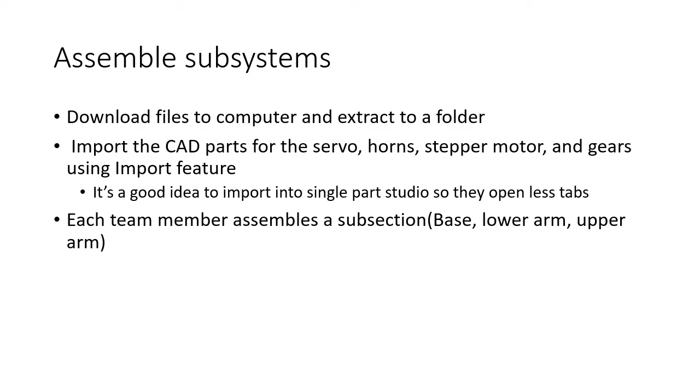After you and your teammates have created all the parts in Onshape based on the CAD drawings, you have the base, the leg, the waist, the upper arm, lower arm, and wrist. Make sure you've renamed all the parts as well, so it's easier when doing the assembly.

Before you can create the sub-assemblies, you'll need to download the compressed files of all the parts that came from somewhere on the internet that you don't have to redraw yourself. To do that, you'll go pull the robot arm import parts from Google Classroom and save it to a certain location.

To download it, you'll need to click the menu button and say open a new window, and then download. You can save these into the download folder or some other folder on your computer that you know how to find.

Once it's done being downloaded, I can say show in folder. And then I want to extract them. So I right click on it and say extract all. That's fine. Give yourself a location to extract it to.

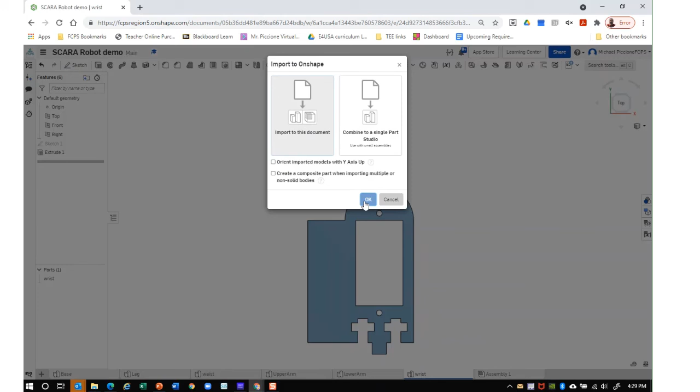And then we'll check back when it's done importing. It may take a few minutes. Once it's done, it should say translation complete, and you should now see the items show up in your list. We have the 40-tooth gear, the stepper motor, the micro servo motor, a gear rack if you want to use it later, a servo horn, the 20-tooth gear, and the 10-tooth gear.

After importing the parts into your main robot file that you share with your teammates, now each teammate can use these parts to create assemblies for the second part of the assignment.

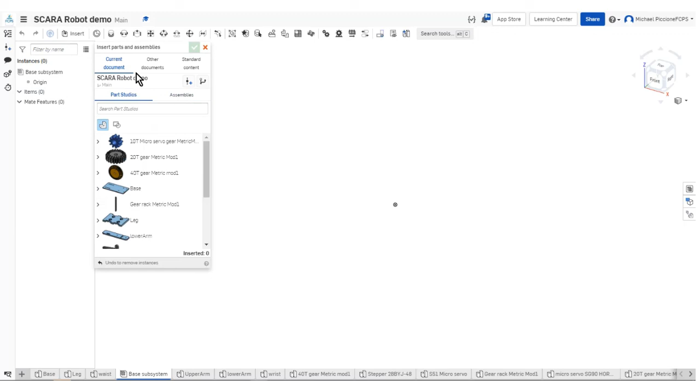Then I'm going to insert the parts I need, and I can find those by looking in the current document Part Studios. So I need the base, 2 legs, and the waist. I'll need other parts later, but I'll bring them in after I'm done with this part of the video.

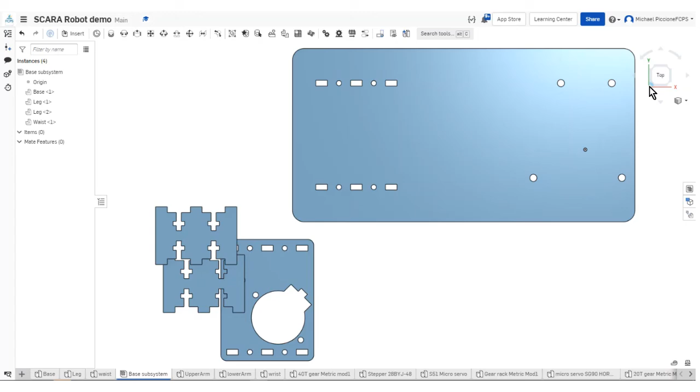So first thing we're going to assemble is the legs to the base. When assembling the base, you want to make sure that when looking at it from the top, the holes on the bottom are farther apart than the holes on the top horizontally. Otherwise, you're looking at the other side of it. If you're looking at it this way, you'll see it differently versus this way.

So the first thing we're going to do is a fasten mate. We click fasten, and we're going to click the bottom of one of the legs, so I get the handle that shows up in the center of the rectangle. I might need to roll over the edge of the surface so I can see the blue alignment tool perpendicular to the face of the rectangle, and I'm going to click the same alignment area on the bottom of the base.

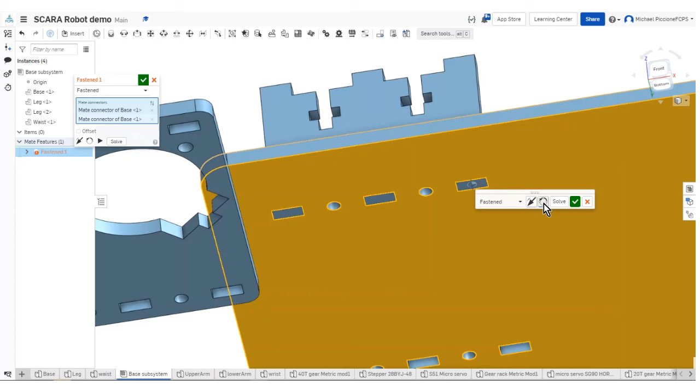If you roll over this, hover on the surface, and then you can click on the center of that rectangle. Once clicked, you can see it inserts it and aligns the blue edges up. You shouldn't need to rotate or flip. If it's good, you click OK.

I'm going to do the same thing again for the other one. You always have to click the part that moves first versus the part that stays still. It seems to highlight it red, I might need to do it again. Sometimes it has an error, it says. Let me double check. Sometimes I find it gives weird errors, and if that's the case, you can always delete and do it again.

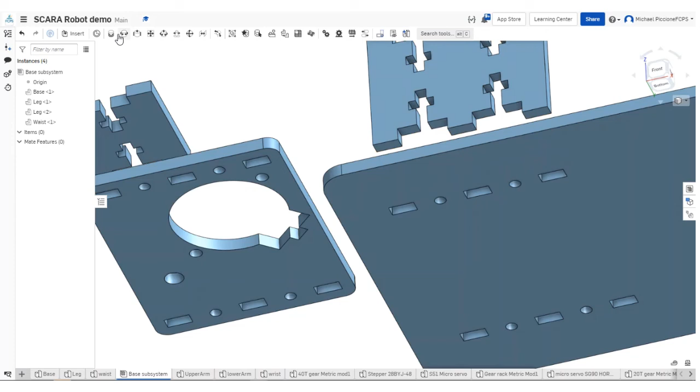This time we can show how you can do it from the center rectangle. It really doesn't matter which rectangle you use. And there, that snapped right together. So we click OK, and do the same thing to the other one, fasten.

I called this the foot, I think, in the instructions of the leg. Just make sure you line the correct rectangle up on the base.

If you click flip directions, it's going to put the piece on upside down, and you don't want that. If you need to, you can change the offset to adjust it up or down, or left or right, but it should align correctly if you click the right spots.

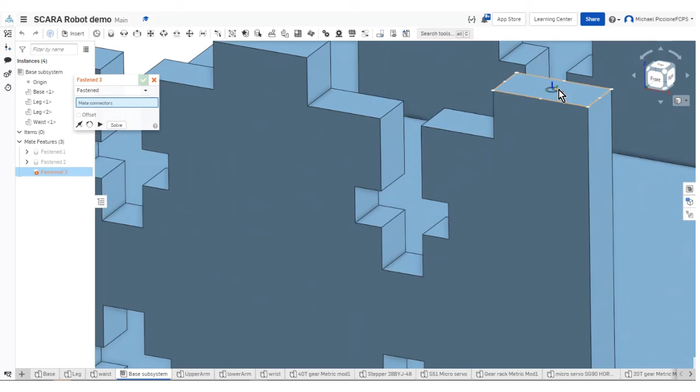Now I'm going to basically do the same thing with the waist onto the top of the legs. So fasten. I'm going to click the top, hover on the top surface of the rectangle of the leg first, then click the center point. I'm going to orient it so the motor notch is facing the inside of the base. So I'm going to zoom in and make sure I hover over the flat surface on the top so I can get the handle to grab.

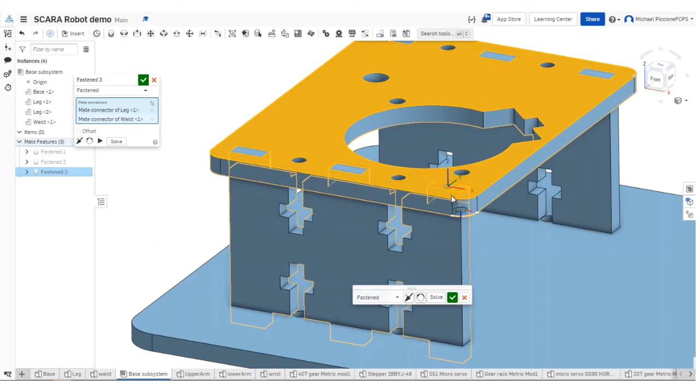Sometimes it's difficult to do, and you might need to change the angle of your view so you're able to select other surfaces. Click here. It snapped it over there. Because it can only handle 2 parts at a time, remember to say solve to show it in place, and we say OK. Now it should be locked in place and I can't move anything. Now I'm going to go ahead and fix the base so it can't move.

Now I want to insert the stepper motor. Insert, choose it from the list. Click OK to the insert tool. Now I can't assemble it just yet because if I click and drag on the pieces, I can see I can actually take it apart, which is what we don't want to do. So don't do that. We're going to select everything with a window select of the stepper motor, then click the group command and OK. Now if I try to separate it, I can't separate it like I could before.

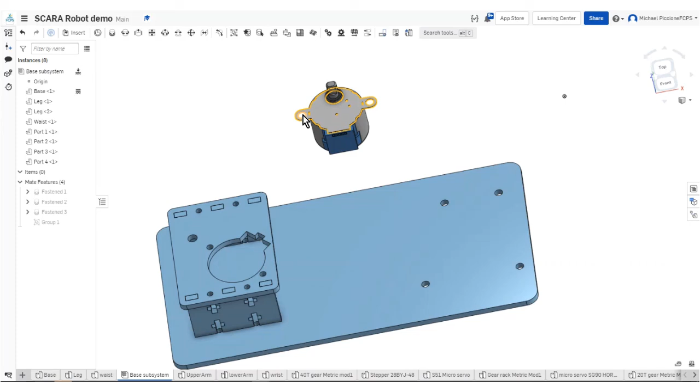Now we can work to assemble it in the right spot. I'm going to use the fasten tool and try to line up the circular hole for the mounting bracket in the motor to the hole in the waist, then adjust the angle until the faces are parallel and the holes line up.

Unfortunately, I don't think our dimensions match, since the waist is in inches and the stepper motor is in metric, the distance from center to center on the holes doesn't match perfectly down to the micron, so it won't let you do a 2-hole assembly on it.

So we're going to say fasten. I'm going to click the top of the mounting hole in the waist for the stepper motor, and then the underneath side of the corresponding hole on the stepper motor. Sometimes you need to change the angle to grab the handle you want. There it is.

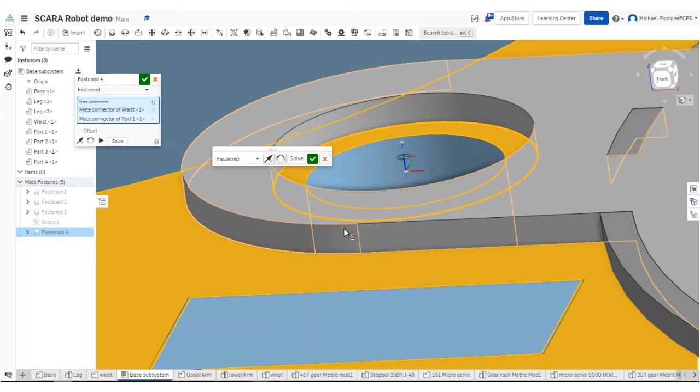And so I'm first going to zoom in and make sure the offset Z height is correct, so it's sitting on top of the waist. It looks like it is. And then I may need to reorient the second axis.

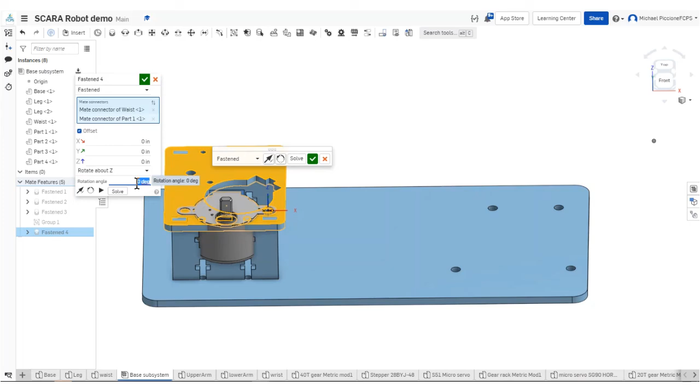I can get to that menu by clicking the offset command. Now we want to rotate about the Y axis, and it should be within 45-degree increments. So first we'll try 45 and hit tab. Oh, that looks like it's the wrong axis in this view. Let's Control Z, undo that. We want to rotate about the Z axis, I'm sorry, I had that wrong. We want to rotate about the blue axis, that's what was Z. So let's try 45. There, it looks like 45 degrees did it.

If 45 degrees didn't do it for you so the holes line up, you might need to go 90, or 90 plus 45, and kind of just guess at the increments. And so we say okay. There is a small error in the file in that this particular stepper motor I downloaded online does intersect our model a little bit here. And when you go to assemble it, we'll have to just kind of file off or use a little bit of sandpaper to sand that piece out.

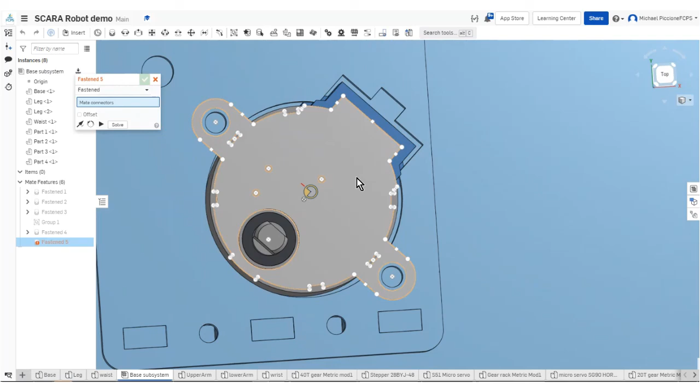All right, so now we're done with the main assembly unit. Next, go on to the base subassembly part 2.

Now that you have the base section assembled, you want to use the Insert Standard Content feature to bring in screws and nuts to make the assembly more realistic and to keep track of the number of parts you need. So you're going to choose ANSI inch, bolts and screws, machine screws, and for this purpose we want panhead machine screws, size 4-40, PH for Phillips, length 0.5, thread length 0.5, and so we say insert.

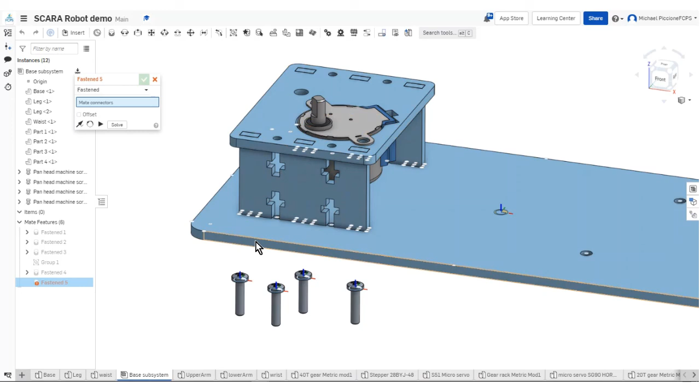So they're going to go in the holes for the base, so we can just use a fasten mate. You're going to click the underside of the screw head where the handle shows up, and they will go along the same alignment hole on the bottom here. And if they show up backwards, just flip primary axis and check. So we'll do that a few more times.

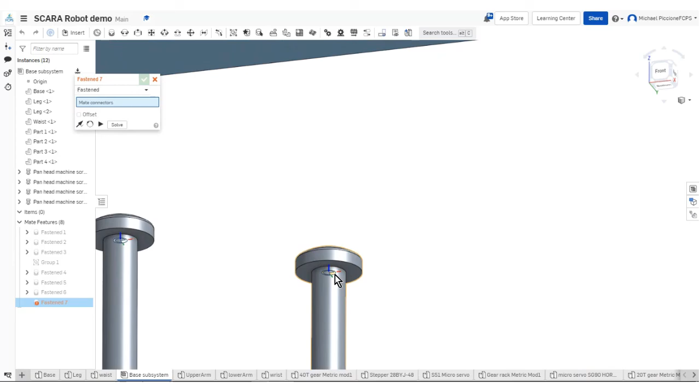Put these on this side. Must not have clicked it on the other one. There it goes.

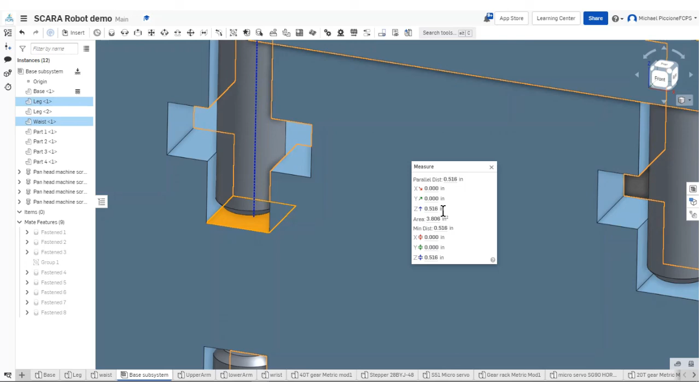They're in place. One way to determine the right length of the screw is to use the measure feature. We click it, click the top surface of where the screw head would attach to, and then the bottom surface of where the screw would run into. We can see that distance is Z, just over 0.5 - 0.516, or if we remember in our directions, 33/64, so it's just beyond half an inch. So we know that a 0.5 screw would fit.

Now we need to put a nut on the screw. Insert, standard content. This time we're going to choose the nut selection, machine screw nuts. We want hex machine nuts, and our size, of course, is 4-40. If you click the bottom chamfer, it'll look like the ones you actually used in your assembly. So we say insert.

I'm only going to insert one and then show you - actually I'll insert two and show you a faster way to duplicate it. So we're going to put the nut on this screw here. The way to figure out how far to offset it is we can use that show measure feature again.

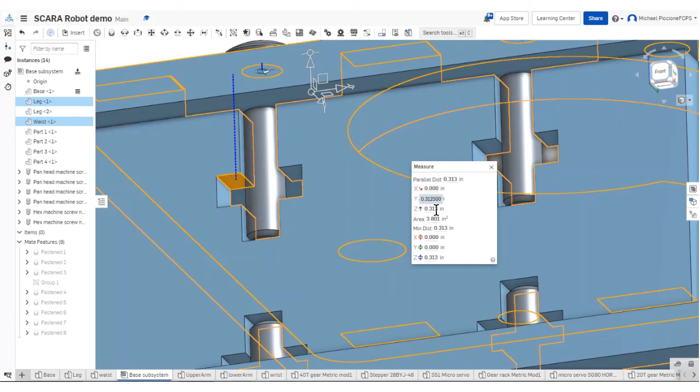So we want to know how far it is from the face of the top of the waist to the face the nut would rest against if you tightened it down, and it says a Z depth of 0.313, which is actually 0.3125, and that's 5/16.

Now I can use fasten. Pick the top of the screw head as always, making sure the handle's highlighted, and then I'll click the handle on one side of the nut on the top side, and we can see it put them together face to face, so I want to offset that Z distance 5/16 or 0.3125. I can click tab to see it in place, and it looks like it's the right depth, but we can see the nut is turned 45 degrees off.

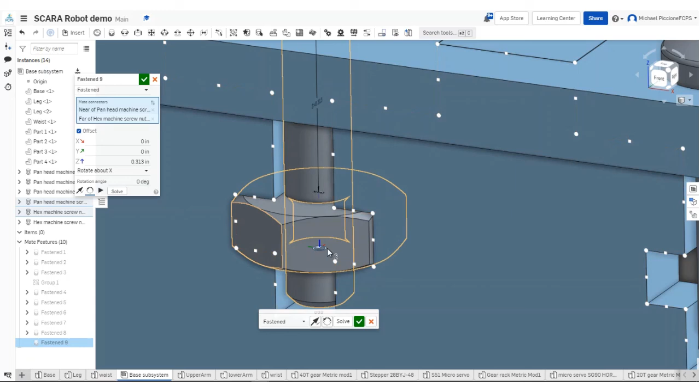So we're going to rotate it so that it sits with the flats against the flat here. We can click OK, and now it looks like it's in the right spot. These nuts are a little bit bigger than the ones we're using in class, so they actually don't quite fit, but that's okay.

Now you could do that over and over on the other instances, or we can also use replicate. What replicate allows us to do is select instances. So if we want to replicate the screw and the nut, you click match face to parts, or you can click face to features or individual faces and do it one at a time. If I say match face to parts...

And click the top surface of the waist, you can see it replicated the screws four times. And I can click OK.

It actually did it twice over here, so I now have two on my previous instance. I probably shouldn't have done that and shown you this trick first. So if you need to, you can just go delete it. I'm not too concerned - that was the first one we did, so I can go and delete that.

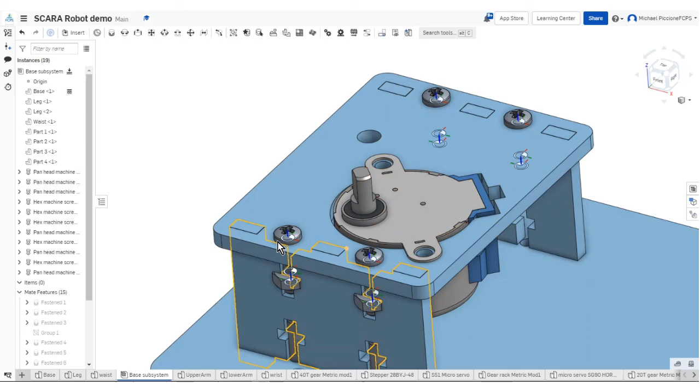Then I can do the same operation on the bottom after I install the nut on this particular screw. It doesn't work to do replicate well when you're changing orientations of a part, because they show up upside down and they're kind of difficult to get turned around.

So we'll just click fasten again, fasten the screw to the nut, make sure to click the correct side of each piece so that when you do the offset, it's the correct distance - 5/16 offset.

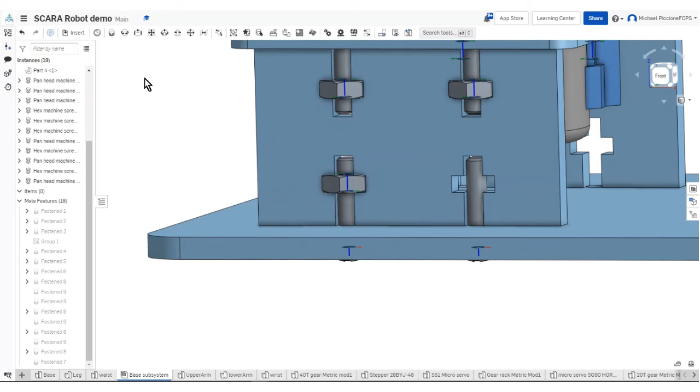That looks right. I need to reorient the second axis to spin the nut around so the flats are against the flats. Click OK - that's good. Since I'm going to use replicate again, I'm going to go ahead and delete this one out of here.

Replicate: select the screw, select the nut, match edge to face, find face match, so click the blue box. I'll highlight the face and it'll go ahead and replicate these. Sometimes it'll go ahead and do these holes too, but it shouldn't, because they're a slightly different size.

All right, that looks appropriate. And we click OK. And there we go, it's all done.

Now, if you don't want to see those handles, you can just say hide mates. They show up on the pre-inserted parts. So we can select them all and hide mates. It looks like they're still on the nuts, though.

Oh well. It's got so many mates in there because of the replication. It's hard to turn them all off.

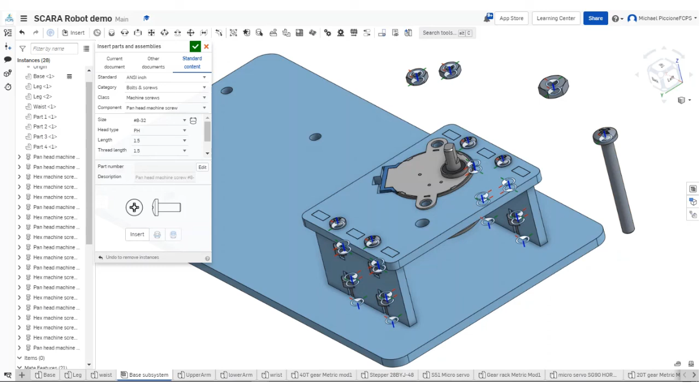Now we're going to insert the screw here and put the nut on top. Fasten, screw will go underneath in this hole here. Flip primary axis, and we'll say check, and then we put the nut on top.

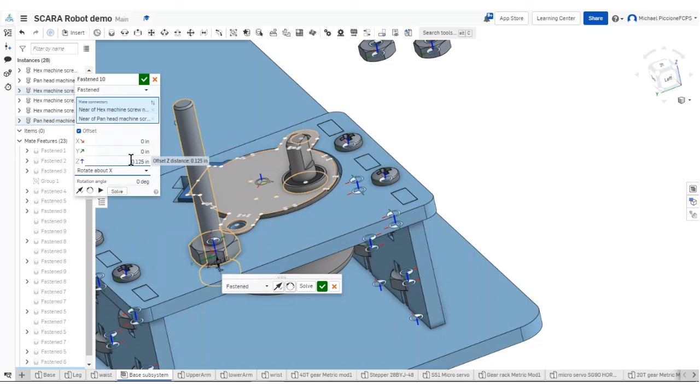And the offset on this one will be 1/8 of an inch. Sometimes you need to do negative 1/8 of an inch to get the offset the right distance. All right, there we go. I'm not going to show you how to do the assembly on these 2 screws because you can do those on your own. Having done all the other ones, you don't need help now.

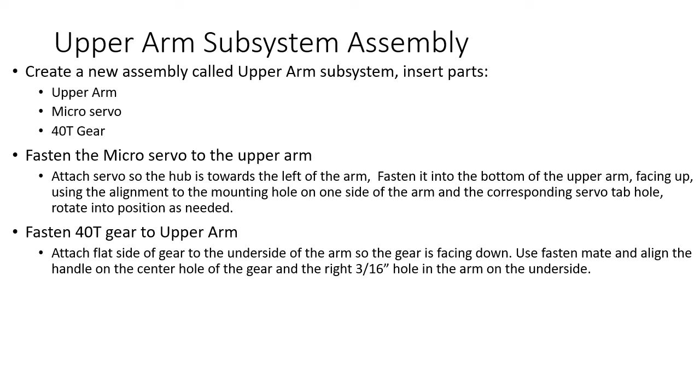To create the upper arm assembly, we'll first create a new assembly and label it upper arm subsystem.

Then we'll insert the upper arm into the subsystem, the 40-tooth gear, and the micro servo.

First, we'll fasten the servo into the slot in the upper arm so that the hub of the servo is on the left side of the upper arm, farthest away from the center mounting hole for the gear. The servo will be mounted in the upward position on the underside of the arm.

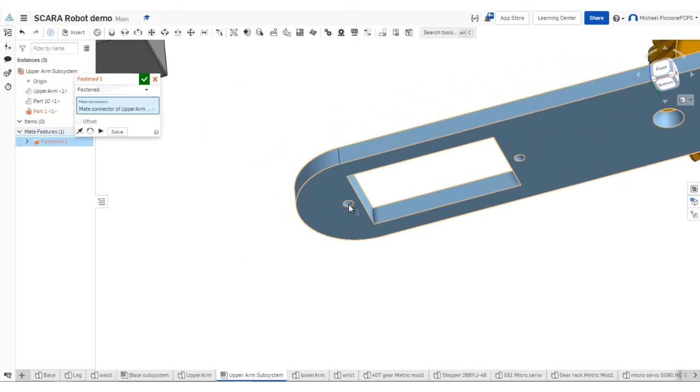So to do that, we're going to click Fasten. I'm going to grab the alignment handle for the hole that's on the farthest left side of the arm. Then the top side of the alignment handle on the servo as well, on the side that has the hub.

If you're not careful, when you go to click the alignment handle, you'll grab the wrong one. So zoom in and make sure: if you roll over the center of the face, it's not the same as the center of the circle. You want to roll over the edge of the circle to grab that alignment handle.

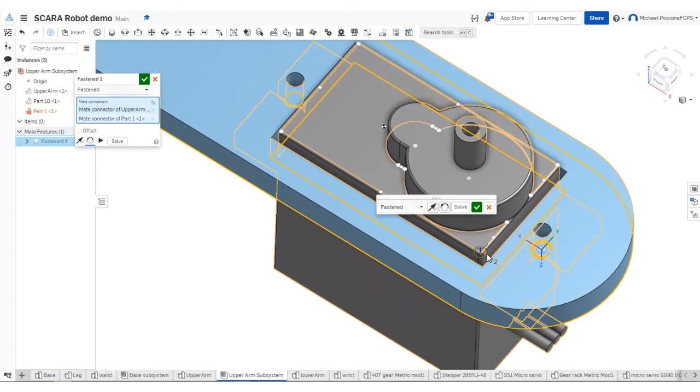Once I clicked, it pops into place, and then I can reorient secondary axis to spin it around. Once spun around completely, it shouldn't have any intersections between the servo and the body of the upper arm, and it should just be flush with the servo in the upper arm. We say OK.

Now we can see the servo hub is on the far end of the arm.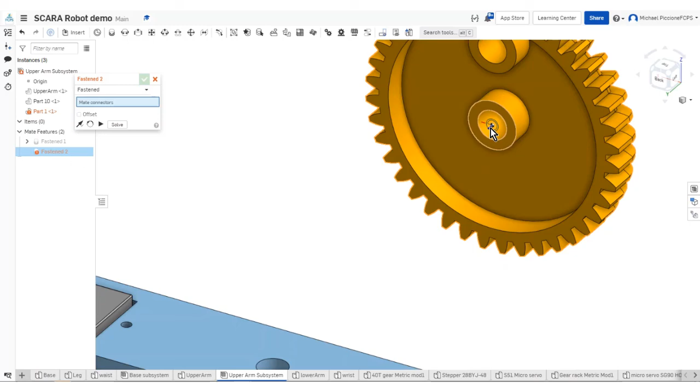To do the gear, we're going to do a fasten mate. I'm going to do the flat side of the gear, so this side at the center hub alignment. I didn't actually click it. There we go. And that's going to go on the 3/16 hole that's farthest away from the servo.

And so it mated the two together. We don't want them intersecting like that, so we want to flip primary axis. So now that one's upside down. Then I'm going to rotate it so that this hole lines up with that hole. There you go, so the 3/16 holes line up.

Don't worry about these two holes here on the end. They're small holes for a zip tie for tying the wires down, which won't happen in this version, but it will happen in the real assembly, so we'll have to kind of pay attention to that as we screw it together.

If I get the alignment I want, I can click OK. Otherwise, you might need to use the offset angle tool to change the rotation of the gear to get it to line up. All right, once it's done, it should look like this.

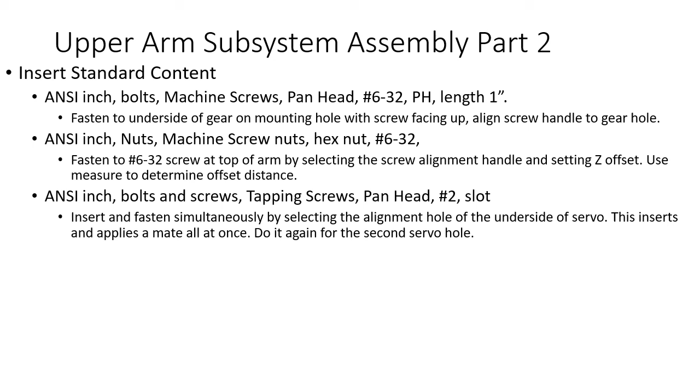Now we can complete the upper arm subassembly part 2 using standard content. First we'll insert standard content: ANSI inch, bolts and screws, machine screws, pan head machine screw, and we want a 632.

Phillips head, and our length will be 1 inch. A smaller screw works, but we'll be using 1 inch in real life, so that's what we'll use in our example.

I'll place the screw, and then I'll go ahead and grab the nut while I'm at it. So ANSI inch, nut, machine screw nuts, hex machine screw nut, size 632. And you can check bottom chamfer. Insert.

While I'm in the menu, I'm going to go ahead and grab 2 of the screws for the servo as well.

Cancel adding in the screws yet. I'll show you a new feature in just a second. So we're going to mount this screw to this hole here on the underside. So we'll turn everything over into position.

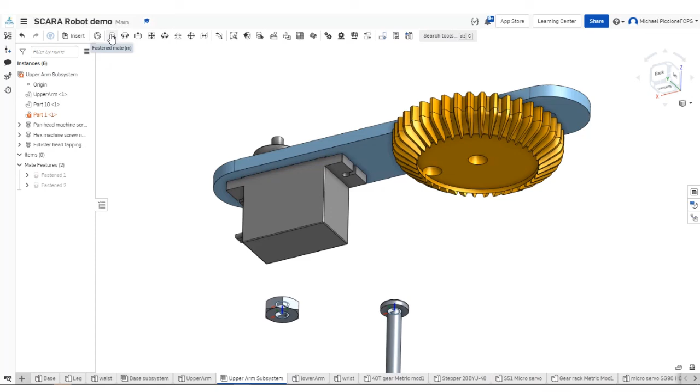Fasten. Click the fasten handle of the screw. And then on the mounting servo head, flip primary axis on the gear, so that the screw is facing up.

Click OK. Now we need to do a measurement to figure out how far apart to make the two. So exit out of your menu and use the show measure details, and we're going to go from the flat surface of the gear to the top of the face of the upper arm, and it says it's a Z distance of 0.417323. We'll just do 0.417, it's fine.

So fasten again, and I will click the handle to the screw since that's flush to the face of the gear. And then the bottom handle on the nut.

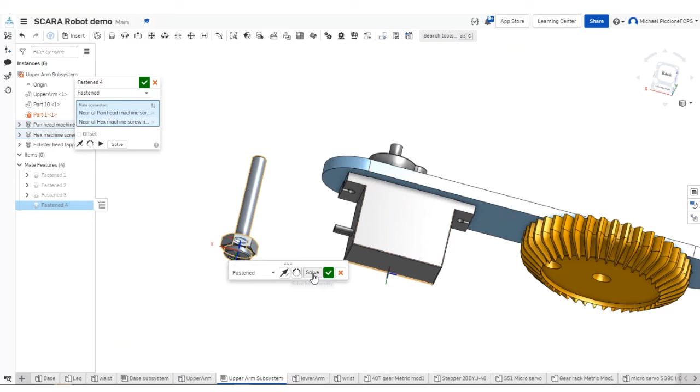Remember, it solves it outside the system, so you've got to say solve to see it in place. And that's obviously inside our part, and that's not what we want. We said we wanted an offset of 0.417.

Tab to visualize, solve it again. Now it looks like it's approximately in the correct position, which works for our purpose. And check to say okay.

Ignore the part where the nut or the screw intersects the gear pieces. This gear model is not 100% accurate due to the complexities of trying to do a rounded edge of the gear, so it's a little bit inaccurate and won't intersect in real life.

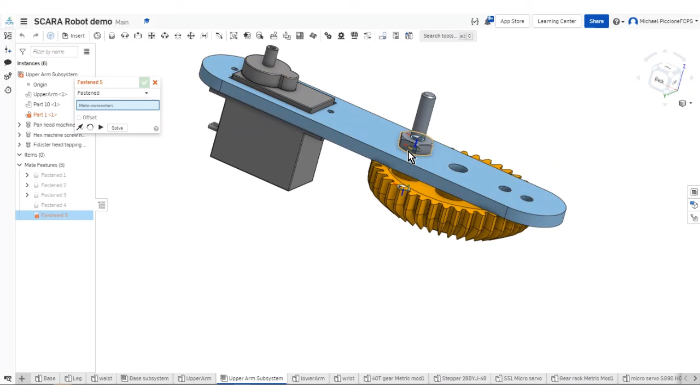Now we can insert screws into the servos. So we're going to say insert, standard content. They don't have the exact right screw, unfortunately. ANSI inch, bolts and screws.

This time we're going to use tapping screws. Panhead tapping screw is fine. And we want to use size 2. Slot, all this, the rest of the stuff is fine because we can't edit it what we want, how we want to edit it. So I'm going to say insert.

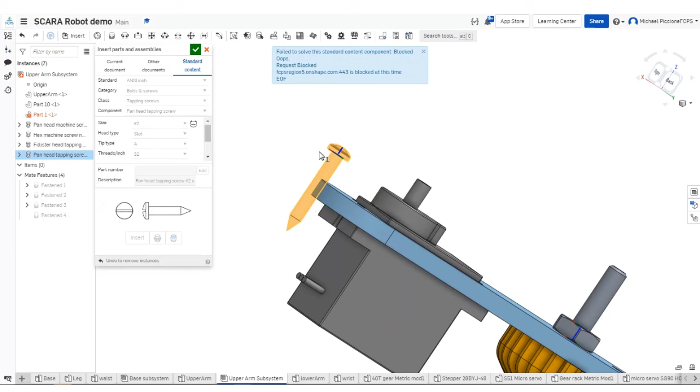And now they're a little longer than we need, but just because of the purpose of the activity, we'll continue to use them. Because they have an automatic handle attachment to them, we can actually insert them into place. If you zoom into your location and kind of find the circle you want to use and hover over it, it'll snap into place. And I can automatically insert them in the right spot. Ignore the fact that they stick up too far in this particular model.

And so I can say insert again. Kind of rotate my screen to get it where I want. So I might need to zoom out really far and zoom back in. And as I get close to a handle, it'll automatically choose a circle hole where they're going to go. And now that they're already inserted, we can just close out the insert menu.

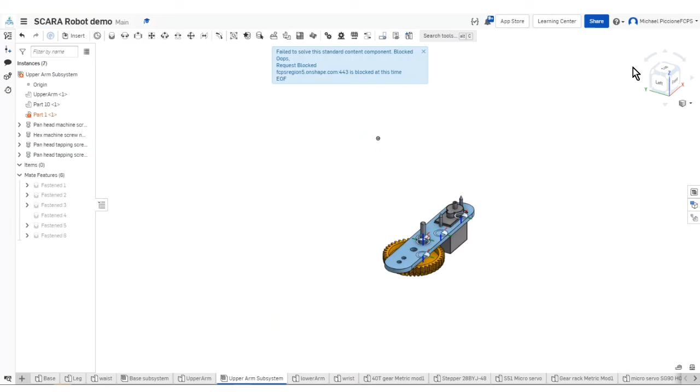Nope, it looks like I inserted one too many. All right, there we go.

And if you want to turn off the little insert handles that show up on your screws, expand the screw menu and turn off the eye for the near and the far attachment points. All right, there you go. Your upper arm assembly is complete.

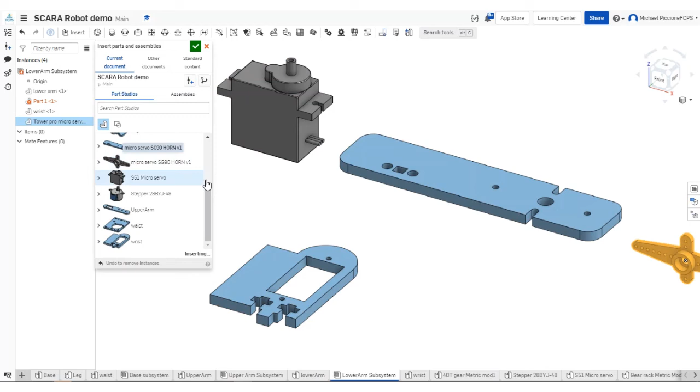First, we'll fasten the servo horn to the lower arm so that the short end of the servo horn is aligned on the right side of the arm, and the long end of the servo horn faces where the wrist mount will be. We'll fasten, and we'll use the top surface of the servo horn at the center hole, and then mount that to the bottom of the arm.

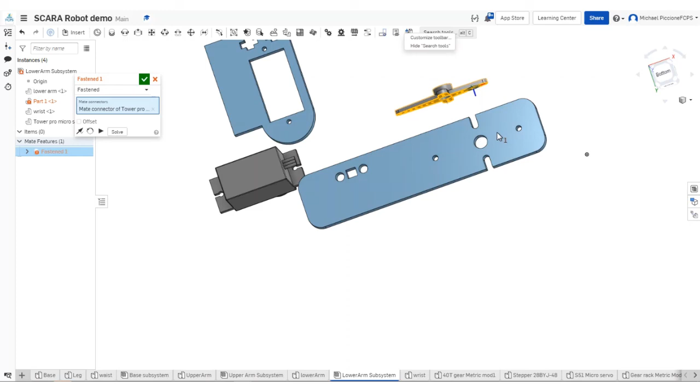Make sure you grab the bottom, on the face so that the circles line up. And I'm going to want to flip it so it's on the bottom like that. And if you need to rotate it around, you can do that, but you want to make sure the long end points towards the holes for the wrist.

And when you're viewing it in isometric, the servo horn's on the bottom and the wrist mount is on the left side of the arm towards the back edge. Okay to confirm.

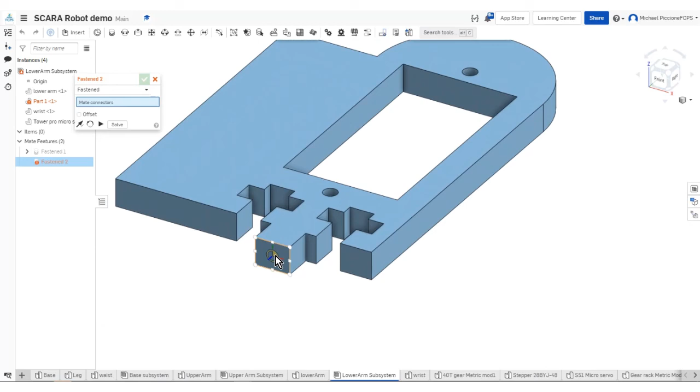Now we'll attach the wrist to the arm. Fasten again. And this time we'll line up the protruding rectangular shape on the bottom of the wrist, just using the center mate constraint for it, and a similar rectangle on the bottom surface of the arm. So hover over the surface and then grab the center point with the blue axis facing through the arm. We'll click. And that snapped it into place.

It should be oriented so this big tab faces towards the outside of the arm. Now we'll insert the servo through the left side of the wrist so that the servo hub is towards the bottom of the lower arm.

Fasten. I'll align the hole on the wrist that mounts the servo to this tab that corresponds to that same side. Make sure you grab the circular shape and not the circular with black and white lines on it. That signifies the center of this rectangular surface, not the center of the circle. If you roll over the edge of the circle, you can probably also grab the handle.

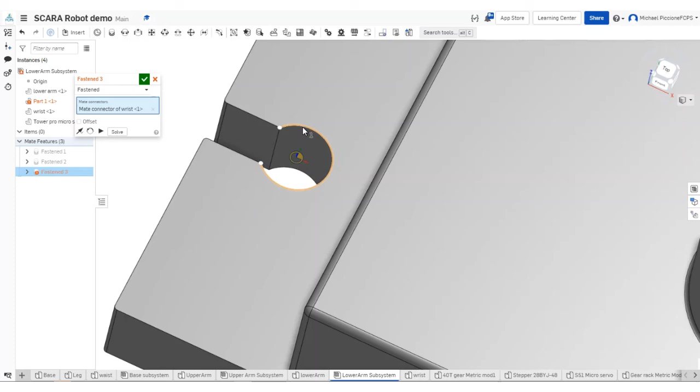Click to confirm. Remember to click Solve so it switches it back over into place. That's going the other way, so we want to flip the primary axis. Solve again. It's okay, it's turned upside down right now. We can just rotate it back over.

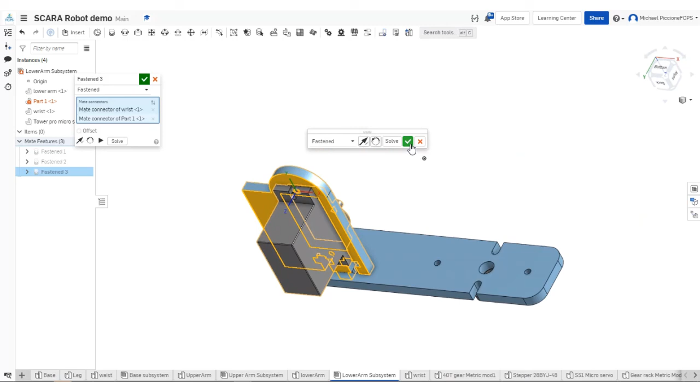Now we want to reorient the secondary axis so the servo is extruding through the rectangular shape it fits into. Then solve again. It should look something more like that when you're all done. Click OK to confirm. That finishes part 1 of the lower arm subsystem assembly.

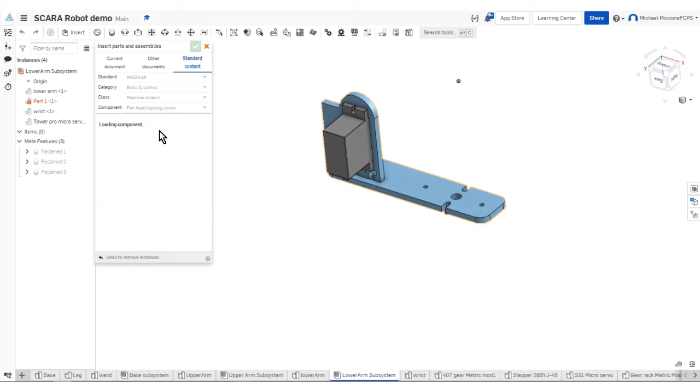For the lower arm subsystem assembly part 2, first we'll insert 4-40 machine screws, length 0.375. Insert, standard content, ANSI inch, bolts and screws, machine screws. We want a panhead machine screw, 4-40, Phillips fine. Length we want 0.375. Thread length can stay at 0.375.

We'll insert one of these. We'll actually do it twice, but we'll show you how to do the secondary insert later, so I can insert it manually and do the assembly first. Fasten: click the handle at the face of the underside of the screw, and then it can be inserted into the underside of the arm in the corresponding hole that goes to the wrist mount. That looks right, and if we zoom in, we see the surfaces touch.

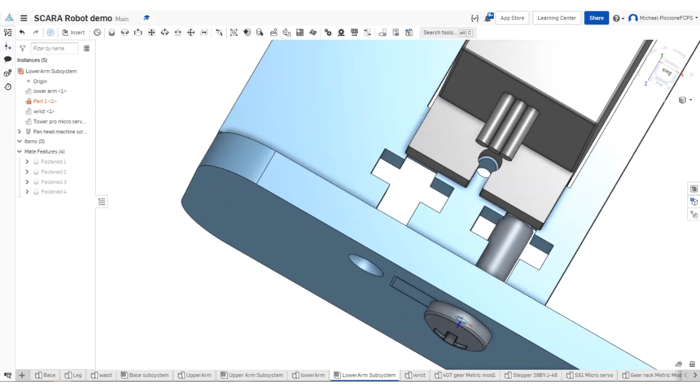We can click OK. Now I can do it again, but I can also, if I choose everything correctly, click Insert, and it automatically inserts with the handle identified. So if you want, you can roll over where it's going to go. Click OK to insert it in that location, and it'll automatically include the fasten mate to that content.

Now we can insert the 4-40 nuts. Insert, standard content. Sometimes it'll say FCPS blocks it; you can just click insert again and it'll work. Bolts and screws, but change that to nuts. Machine screw nuts, hex machine screw nuts, size 4-40. Insert.

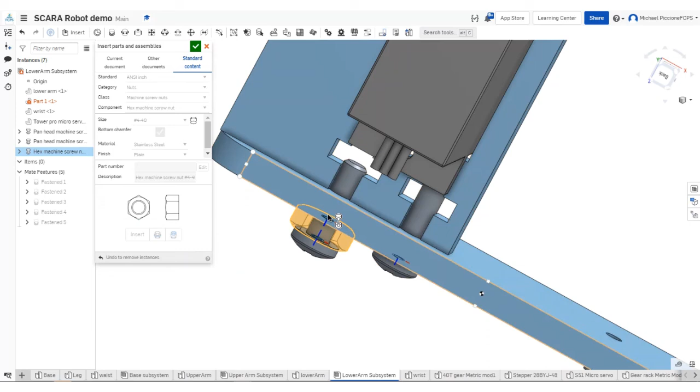If you notice, it has the handle line up already, so if you're careful you can highlight where you want it to go to insert it into place. But first we're going to measure where it's going to go instead. Since they have to be offset, it's a little more complicated, so I'll just insert 2 of them and then install them in place.

So to figure out how far we need to offset, we're going to measure from the flat surface on the bottom of the T-slot shape to the flat of the bottom of the arm. I don't think I clicked it the first time. It says it's a distance of 0.25, so that's how far our offset will be.

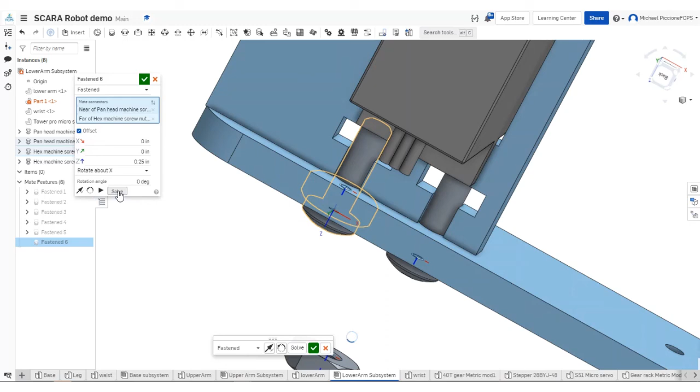Fasten: click the insert handle for the screw and the bottom insert handle for the nut. It moves it into place. We want to say solve so we can visualize it. Click the offset option box and change it to 0.25. Solve again to see if it works. You might need to click solve 2 or 3 times so that it puts it into place.

Now we need to rotate or reorient the secondary axis to spin the nut around so that the flat of the nut lines up with the flat of the T-slot. There we go. Sometimes it takes a little while due to the lag on the computer. Click OK, and we'll do it again for the second one.

Now we'll insert small tapping screws to attach the servo horn to the arm and the servo to the wrist. ANSI inch, bolts and screws, tapping screws. Panhead tapping screws are fine, and we'll say number 2. Again, they look a little large, but they work for our purpose.

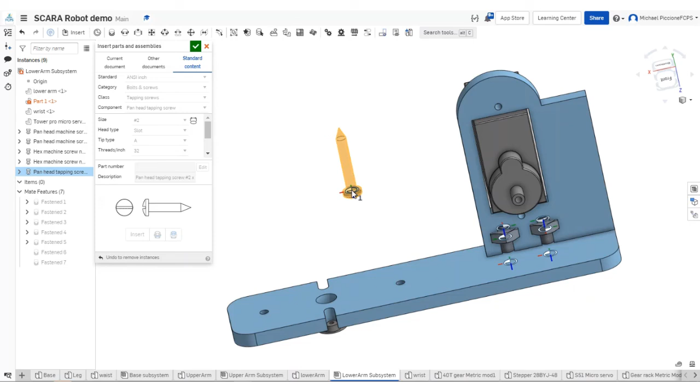Don't worry about the fact that they extrude a little bit too far. So we can say insert. Since these automatically have a handle selected, you can roll over the surface and they're going to go down through the lower arm into the servo horn. So we can line them up on that hole. Click to place them and it'll insert them automatically.

If you want to do it separately, you can insert it and then use the fasten technique. Click the handle for the screw, the alignment handle for the part, flip as needed, and complete it that way. We're going to put 2 here on the servo horn and 2 on the servo.

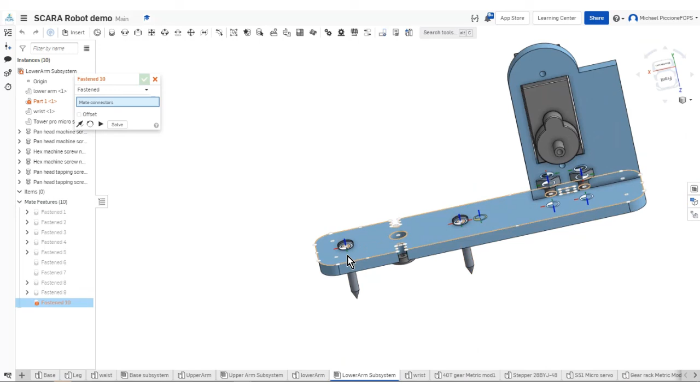These will go on the back side of the servo, so the screw head faces through the wrist and screws into the wood. I'll do another one on the bottom. In real life, they won't stick out quite as far as they do in our example, because the screws we're actually using aren't available in Onshape.

So we have our 2 screws attaching the servo to the wrist, and then the 2 screws attaching the servo horn to the lower arm. And that completes the operation for the lower arm.

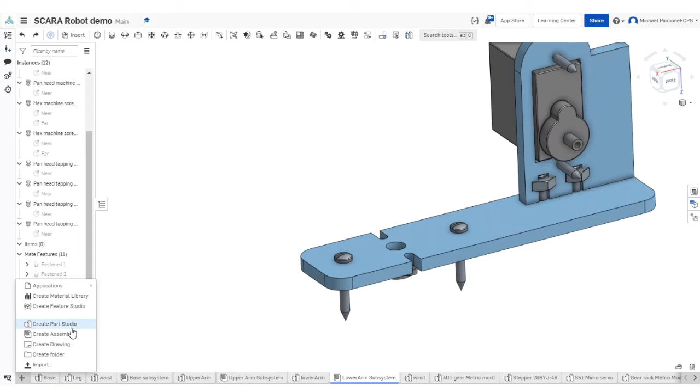So we'll start a new assembly. Call this robot final assembly. And then we'll insert our assemblies: the base assembly, insert the lower arm subsystem, and the upper arm subsystem. And then we need the 20-tooth gear as well.

Oops. Make sure to click OK and not close the box out like I did. So first we're going to attach the 20-tooth gear to the stepper motor. We can do that using a revolute mate.

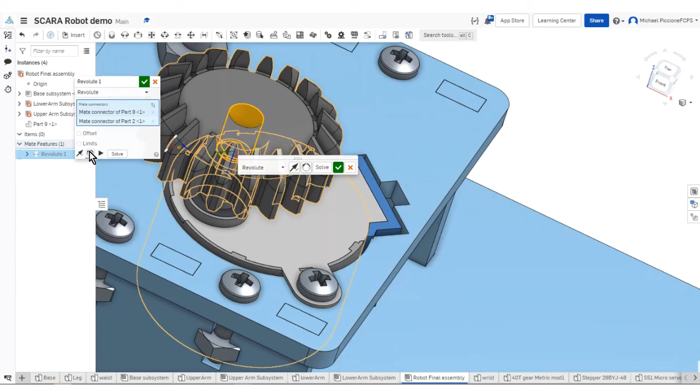We'll attach at the bottom of our gear so that we grab the handle in the center of the gear to the top of the stepper motor. And we're going to flip primary axis so that it mounts in an upside downward fashion. Then we can adjust the offset if need be, but it doesn't look like the gear actually intersects with the base. Looks like it'll be okay. So we click OK.

And that's good. Since we used a revolute, it'll be able to spin later. We're going to want to go ahead and close out of that. We'll fix the base so it stops moving. And now we can spin our gear.

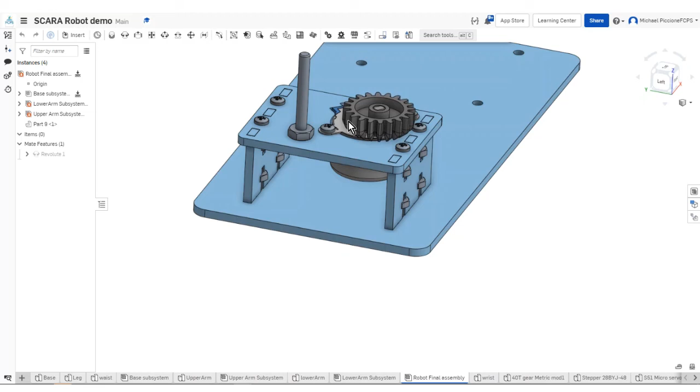Now we'll put on the upper arm through that gear on this screw, and our gear should mesh in real life. I don't believe they mesh correctly on the program. So, revolute mate.

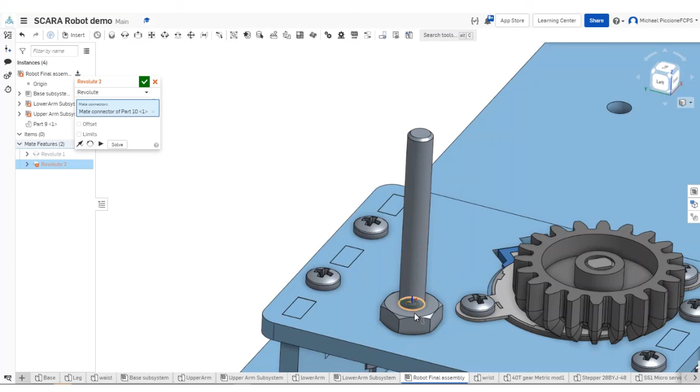Again, we'll select the bottom of the gear where the center hole is. And we'll try and get the center mounting hole or center alignment hole for the nut so that those two surfaces touch each other like that. In theory, the gear should be a little bit higher than the previous gear, and the gear shouldn't intersect any of the screws. If it does in real life, we can just adjust that nut a little bit as needed.

We need to see it working, so we say solve, and that brings everything else over here. We'll go through and attach limits in a little bit. Confirm that, and then we can click and drag it and spin it around. I'm just going to rotate a little bit so we can see that in real life our gears will be the correct distance apart, but these gears ended up being a little bit big after they've been CAD'd, and so they intersect each other.

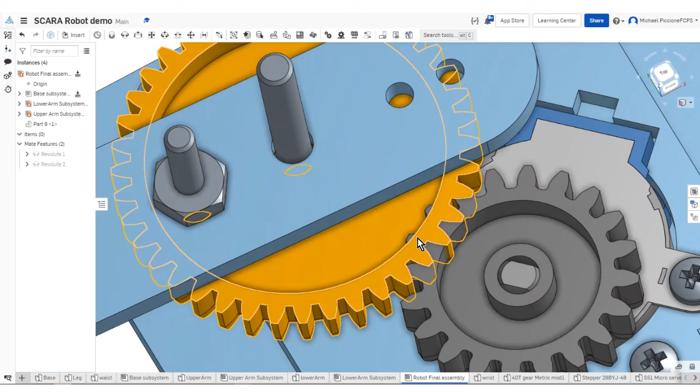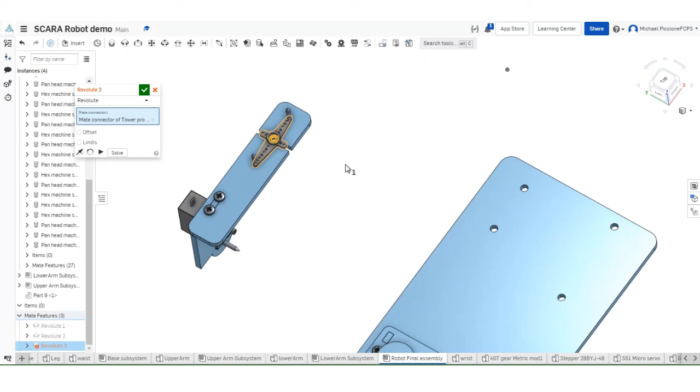Now we'll attach the lower arm to the upper arm. It doesn't matter the orientation of the lower arm since we're going to move it around. So we're going to do a revolute mate using the inside of the servo horn, the inside circular surface of the servo horn, to the top peg of the servo on the upper arm.

So when it inserts, you're going to want to do a flip primary axis so that it's pointing down. Solve it so that you can see the arm in location. That looks right, ignore the screws protruding out. Now this arm should be able to swing back and forth.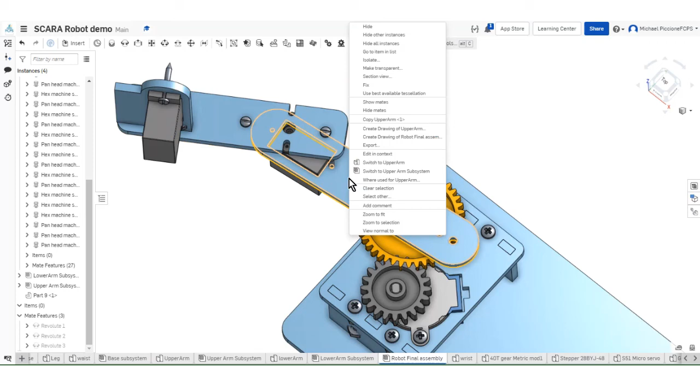To establish the limits on the servo, we're first going to complete the lower arm limits, and then we'll do the upper arm limits. To make it easier for parts moving around so much, fix the upper arm section, so now only the lower arm section can swing back and forth.

Now we'll double click the mate that attaches the upper arm to the lower arm. You're going to need to figure out where a relative home position might be, where the arm is extended fully out, something similar to the example. You can click play, you can see the servo moving around.

Now we're going to establish limits, and we're going to try negative 60 and 60, hoping this is the current home position. Now if we've solved it, we should be able to click and drag, and you see it can move 60 degrees in that direction and 60 degrees in this direction. If that's good for you, you can go ahead and click OK. If not, you can adjust these numbers so that it swings about 120 degrees in front of the upper arm.

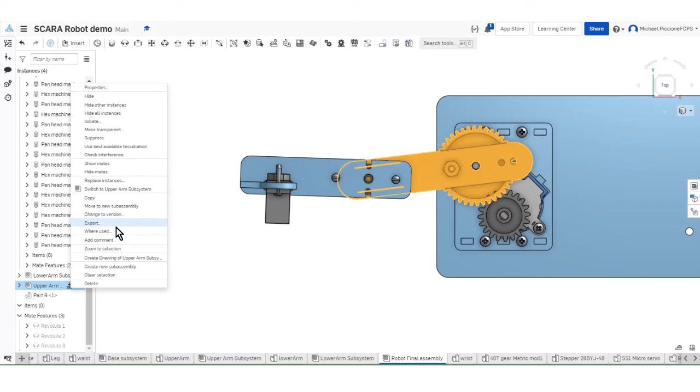Sometimes it's hard to figure out where to click. If you right click on the arm before you select it, you should be able to say unfix. So now we're going to click the mate we used to attach the upper arm to the waist and set its limits.

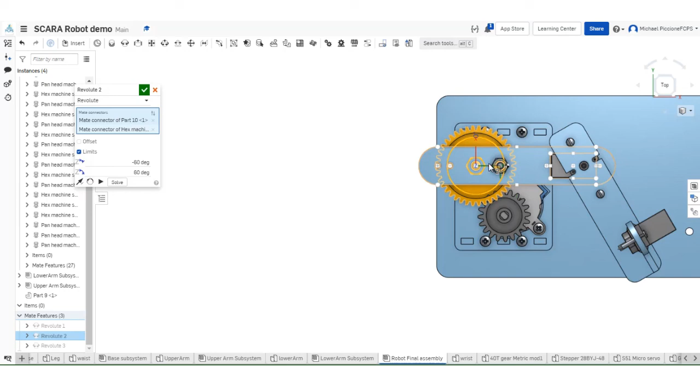Its current position will work sufficiently for this, so we'll go ahead and give it a try: negative 60 and 60. Don't worry about what the lower arm does as we move. If I click solve, it switches around to this position, which is its natural 0 degrees position, and that's not going to work if I click and try to drag it.

I really want kind of 180 degrees after that. So 60 plus 180 degrees would be 240. And 60 below 180 degrees, we can try 120.

And there, it looks like that works. So it'll be able to move from this position to this position. The goal being that this servo here doesn't collide with the waist section. Really, this movement actually can exceed 240 all the way around to about 315, I think.

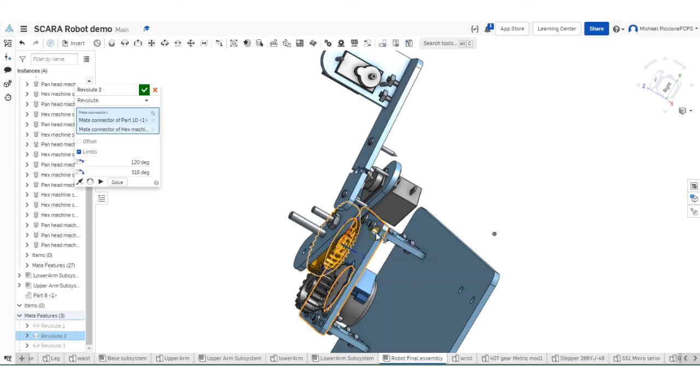There, it looks like 315 will just get it to where the servo doesn't collide with the waist. These servos only have a degree movement of about 120 degrees, whereas the stepper motor will be able to spin continuously in either direction based on what numbers are fed from the Arduino. So we can click OK, and we have completed the first part of the assembly aside from adding standard content.

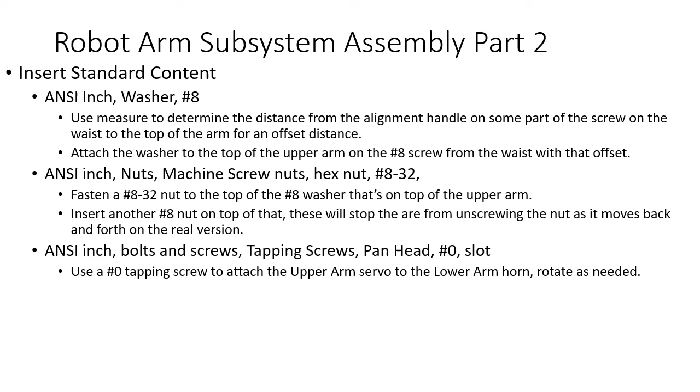Now we can go ahead and add standard content. This part's not necessary, but it'll help us with understanding the actual assembly of the real arm. So the first thing we're going to do is insert a washer from standard content. Again, if it says Fairfax County blocks it, just close the menu and try it again. It should show up the second time.

ANSI inch, washers, type A plain is fine, and we want a number 8. Insert. And there it shows up. So we're going to insert it so that it's on top of the upper arm on the screw here. If you're lucky enough to place it in the right spot, you can click OK. Otherwise, you can place it out in the open and then move it to the correct location as needed.

Now we're going to insert 2 nuts on top of that are size 8. Standard content. Change from washers to nuts, machine screw nuts, hex nuts, 8-32. Insert. Give it a minute to catch. All right, that looks like that's going to work.

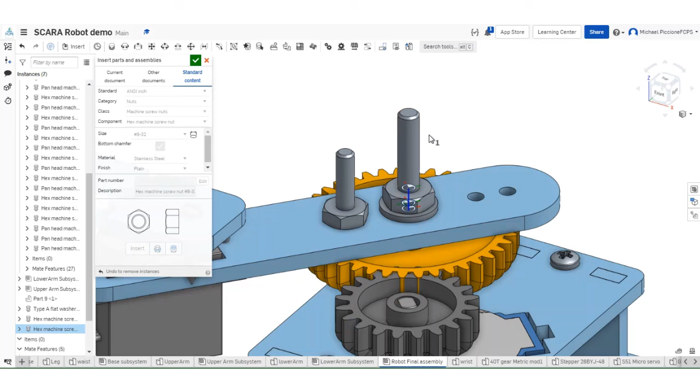Again, I'm going to insert another one because technically we're going to do this twice. And I'm going to change my angle and zoom in so it's easier to grab the right handle I want to place it on. There we go. In real life, we'll use 2 nuts, but we won't tighten them down very much, and we'll tighten them against each other so that this will spin freely, but won't be able to spin the nuts back off, and it won't be able to move up and down the screw shaft.

All right, the last thing we're going to put is a screw in here that is a size 0 tapping screw. Standard content. Change from nuts back to screws and bolts. Tapping screws. Panhead tapping screw. And we want a number 0.

I'm going to place this one off to the side since it's a little bit hard to get in that hole to place it. There we go. And it's awful small to see.

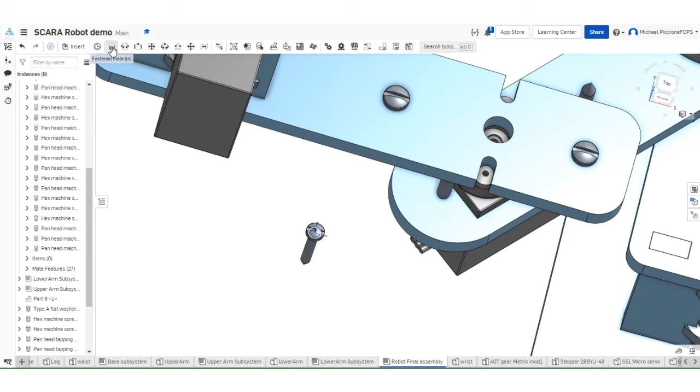So we want to do a revolute or a fasten mate should work okay for this. Fasten mate: click the handle of the screw, zoom in and click the top surface of the servo horn. And it should place the screw in there. If you need to flip it around, you can. If it looks like it did okay, you can go ahead and click OK.

That's, again, not necessary, but it's more for our purposes to know what screws we're going to need when we do the real assembly. All right, and that should be it. If you want to turn off the handles that show up on the screws, you can expand them in the instance menu and turn off the near and far identifiers. If you need them again when you're doing an assembly later, you can always just turn them back on.

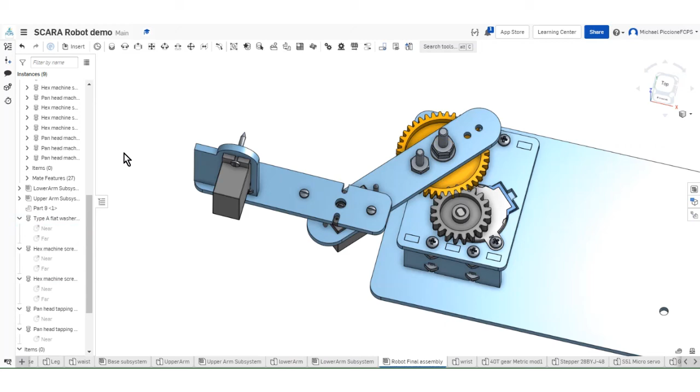There you go, and that is the robot arm done. Before we start our design modifications, being able to move it back and forth, and once you're able to program it in Arduino, you'll see how what we learned in Arduino is assistive to the project.